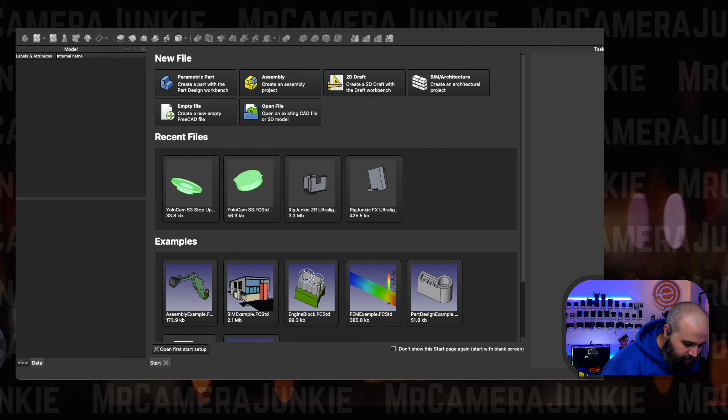All right, so we're doing FreeCAD. Okay, this is what Paul was saying, the crossbar by the window. Oh, I think that's the lights. If you're talking about the crossbar over here, this right here in the background, I'll go ahead and show you. None of that is that.

So now let me click the edit screen. All right, that worked. All right, and we're back to it. FreeCAD. So what am I doing today?

Today I'm gonna give you a real gem. For those of you watching this as a bit of a tutorial, this is exactly what I'm gonna do for you. The hardest thing, or at least for me, one of the hardest things to get done when it comes to CAD or 3D modeling is threads, right? And to create a step-up ring, you need to get the threads correctly so it can fit all of the filters on there.

Yeah, it's giving me the error again for the ISO. I got the error with the ISO. I got it.

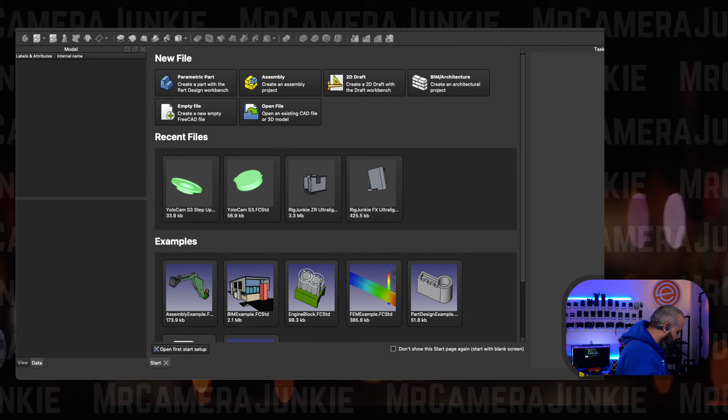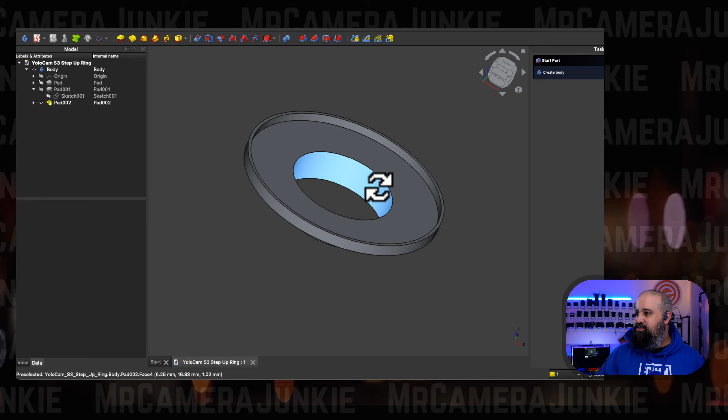All right, I'm going to go ahead and click this. This is the step-up ring in CAD. And as you can see, I don't have any threads on there, right? Because I didn't make it here. And I'm going to show you how we do that. So, you know, foreshadowing.

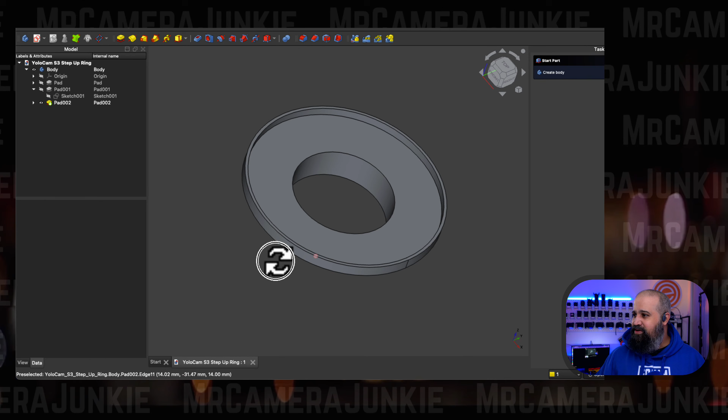I'm going to go ahead and make something very similar to this, and I'm going to do it live. I'm going to do it right now. I'm just gonna grab this as reference, but it's gonna be something similar to this. So let's go ahead and do that. I'm gonna go ahead and hit start.

And here's an FYI for everyone: I really don't know FreeCAD so well, because all of these things—assembly, 2D, all of these other things—I've never even opened these. I've only used parametric part, or parametric, however you say it, and the part design. That's all I've done, and just with that, it's just going step by step.

Whenever I come to a block, I go ahead and Google that, and I just continue to build on it. It's like you can't learn to be an expert pencil artist, but you can start doodling, right? So I started doodling with this application, and now we've gotten to a point where I'm going to remake some of my first designs, because I've learned so many skills to make things better and easier to print.

So there's going to be a version 2 for the Nikon ZR Rig Junkie kit, and also another one for the A7C Mark II, because even though what I made is successful, I'm going to remake it better.

All right, so let's go ahead and rock and roll. Today I'm going to be doing a lot with the keyboard.

Go ahead and click the parametric part. We get to a blank slate. The first thing we're going to do is create a sketch, and pick our plane.

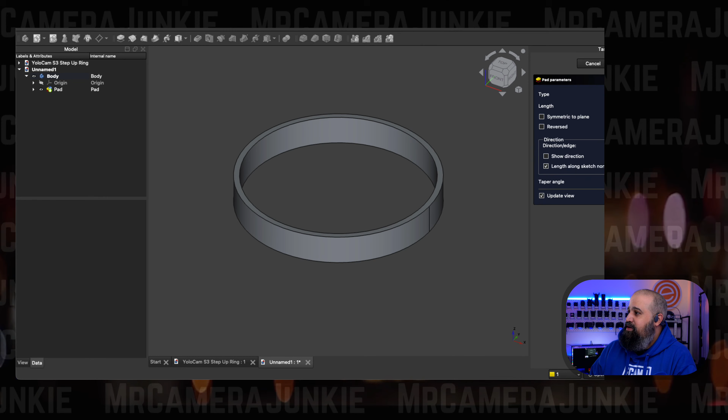How many millimeters did I make this? Exactly that, 10 millimeters, so that's perfect. Now we're going to hit OK, right? We're done, we're starting with the base. So this is what's going to fit snug, 10 millimeters over the PTZ cam that Doc has.

Okay, now the next thing I'm going to do is pick the next layer of what I'm going to sketch on, and I'm going to sketch right onto that thin little brim right there. So I highlight it, and I'm going to once again create a sketch.

Now I'm going to select this one, which is like the external geometry tool. Did I get the word correct? Yep, see, create external geometry. And I'm going to select the inside edge of the circle, so now we have a reference point, and that's all we're going to need with this tool.

We're going to go ahead and go back to the circle tool. Start at the circle datum point, and we're going to click the first circle, which is going to be that same inner part, the inner diameter. That's the word I was looking for.

Okay, so now that we have the inner diameter, we're going to go ahead and select the outer diameter. How much did I make? Because I should have added 2. So if it's 67, I should have made it like 69. Yep.

And that's exactly what I'm going to do again. I'm going to do 69, and I'm going to put 0.20. Did I do that? So I don't remember. You know what, that's why we have the reference one.

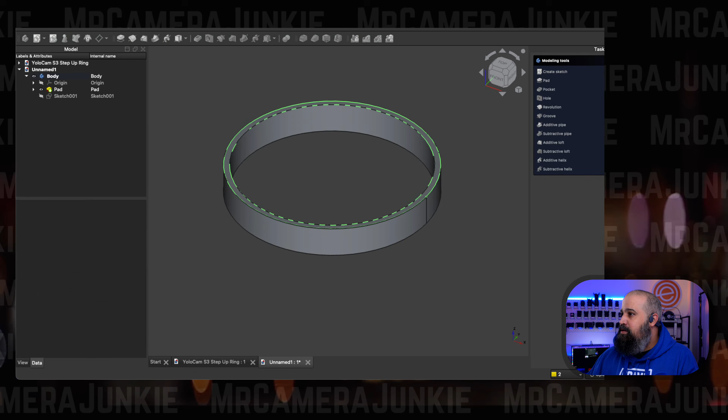I don't get why it's giving me those two lines. Okay, let's go back to the sketch. Let's just delete that. What is this? Delete this.

First, inner diameter. Holy crap. No. What? Is it that small?

Okay, I was doing it right, I was just seeing it wrong. Okay, hold on, let's do 70. Oh, come on. Oh my goodness.

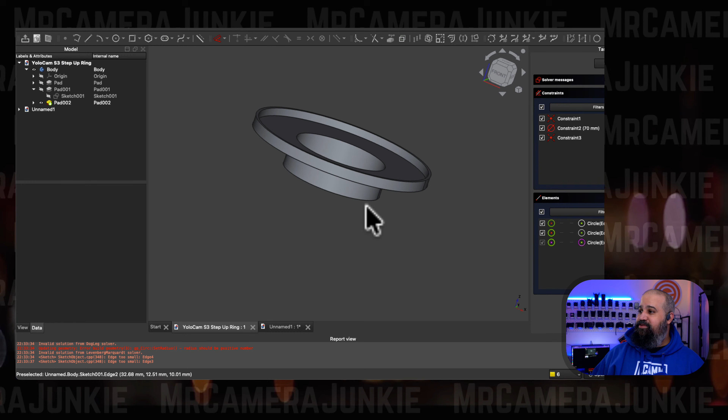Okay, gotta go back to my reference point over here. Okay, let's create a sketch. I'm gonna close that, let's create a sketch.

Datum points. So it was 69 on the dot. So I didn't add the little extra on the original one.

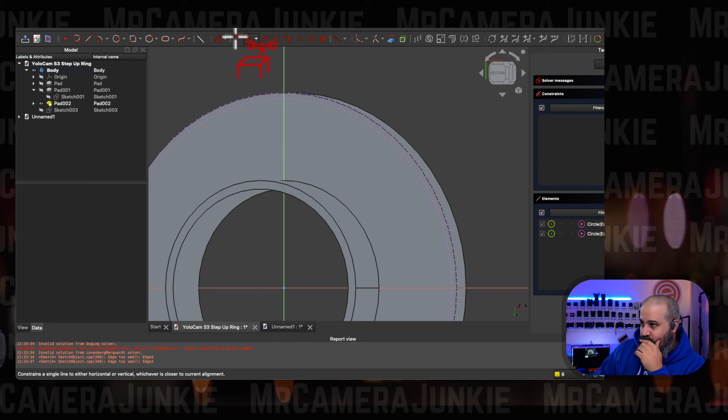Okay, this is what's going to be important here. What is that size? 66.90. Interesting.

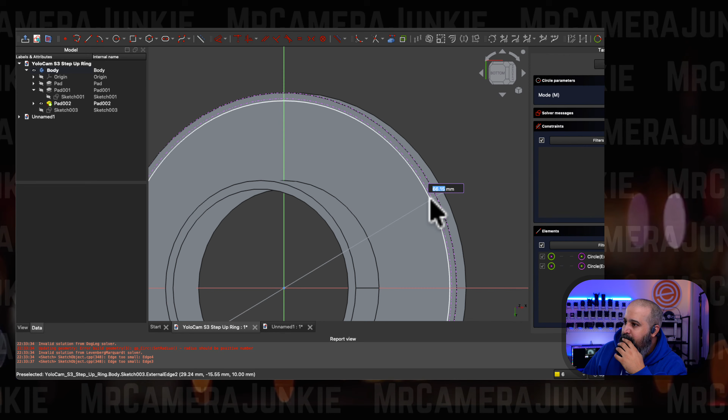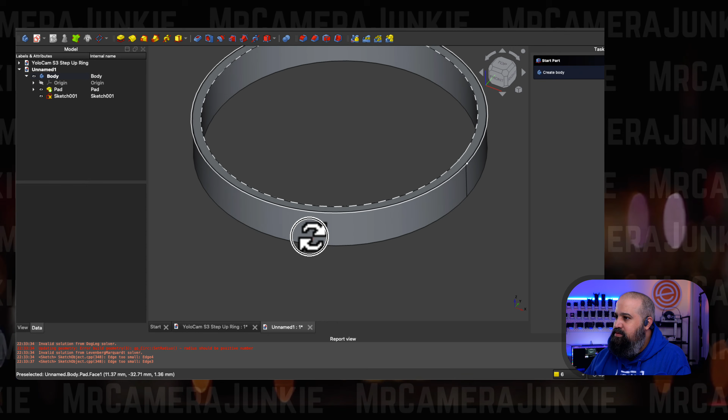Okay, all right, we referenced what we needed to reference. Okay, go back to my sketch, I think I have a better understanding.

Let me delete that circle here. Okay, and even though it's there, I need to start with the 66.9, and I'm gonna do 67. Yeah, let's just go 67 on the dot. All right, we're gonna go to circle on the inside.

Okay, that's such a minimal step up, but that's exactly what's needed. Okay, so I was mostly confused, and this mouse thing is driving me crazy right now.

Delete it. Okay, perfect, I'm gonna hit close. Okay, so now I basically just have a little, that's how much of a step up it really needs.

If you, I'm gonna zoom into it right here. See, it's just basically offsetting, because like Doc had mentioned to me, the front of the camera itself is almost at that size, so it was just a little bit. He said he was gonna tape it, but we have the ability to do this, so that's how little of a step up it needs.

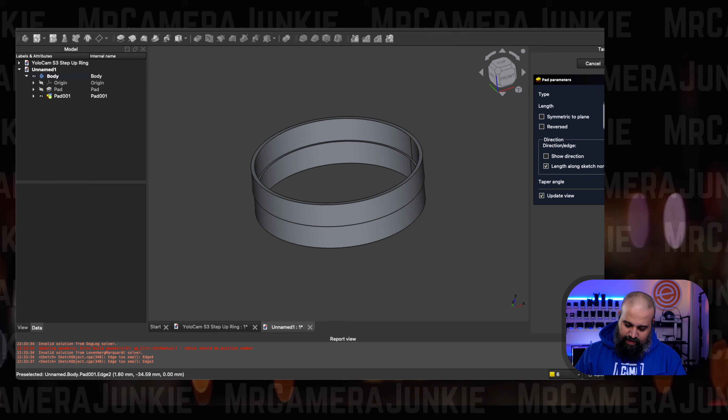But I don't think we need that much. Four millimeters. Okay.

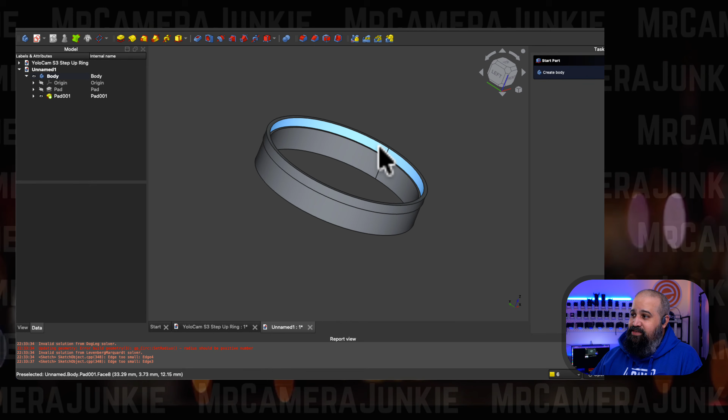And that's pretty much it, right? We have the inner diameter, which is this part here in blue, that's what's gonna hold up snug. And now we just have the 4 millimeters that is gonna stick out, and this part here is where we're gonna throw the filter threads.

So let me go ahead and save this. Tail Air 2 step up.

I'm gonna go ahead... no, brother. My struggles today is that I just decided to update to Tahoe last night, and I'm regretting it, because even though I had installed it on both my laptop, excuse me, and my Mac Mini in the back, I'm rarely on those machines. So for that reason, I hadn't come across any of the issues, and now all the settings on my mouse and everything are just all reset out of whack. And I even had to switch cameras because my application for the anamorphic is not playing the best with my setup right now and everything that I got going.

So I'm gonna go ahead and, later on, maybe tomorrow, start unplugging everything and just start plugging things in one by one to see exactly where the hiccup and the issue is, or if it's my app completely. And then I'm gonna have to sit down and do some programming.

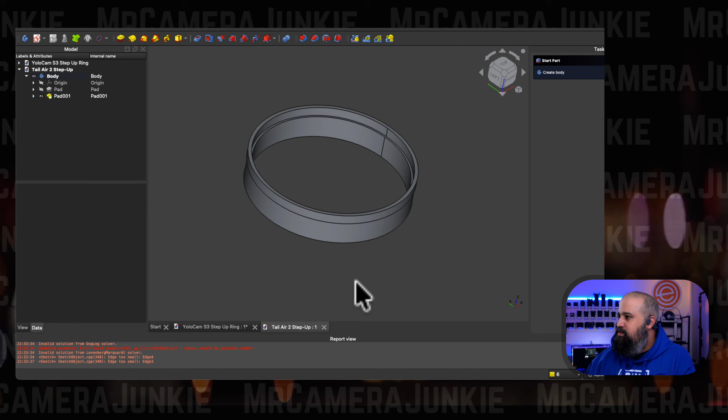Okay, now that we saved it, we can export the file now. We're gonna go ahead, oh, we have to select it. So over here, we're gonna select the body. It's all green, so it's all highlighted.

And now we can export that. And it's already got the name, and it's being saved in my FreeCAD folder.

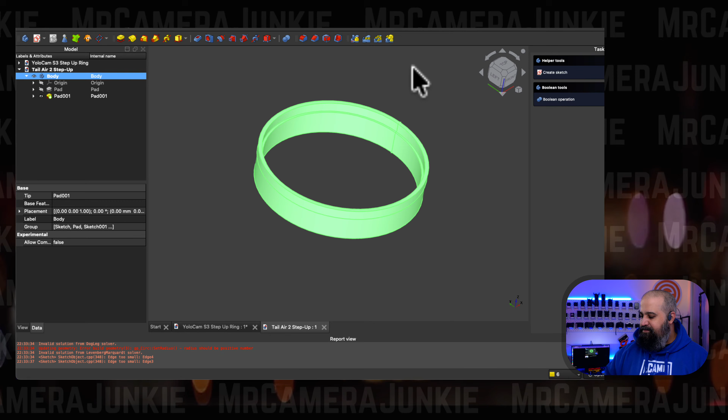Perfect, okay, so now that that's done, basically I can close this out. And I'm gonna close the window, should I? Actually, you know what, just hold on there, just leave it there. Let me go ahead and open up the other things first.

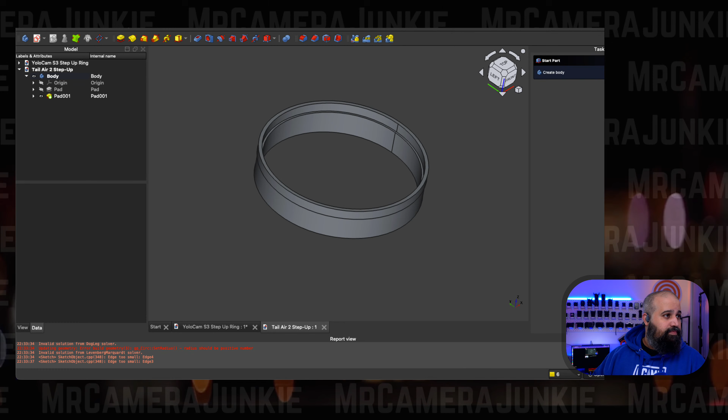Like Bambu Lab. Okay, so Bambu Lab is not there, let me go ahead and switch this up over here. Bambu Studio, perfect, okay.

Okay, so now we're in Bambu Studio, and this is the build plate. Let me go ahead and find this STL that I exported. What did I call it?

It was the Tail Air 2, but see, that's why we left the other application open. Tail Air 2 Step Up.

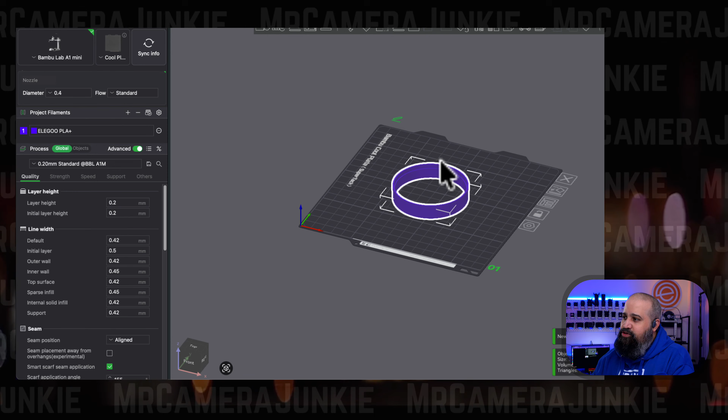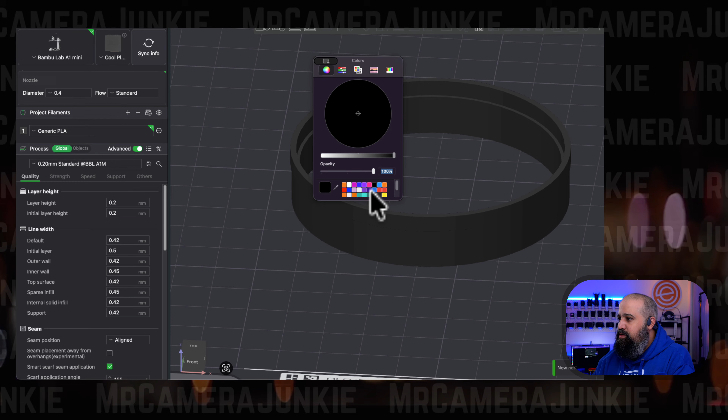Okay, so I grabbed the file and now I just throw it on there, and finally we have it on our build plate. But as you can see, we still don't have... actually, you know what, let's go generic here. Go with a light gray, I think that will look best.

Nope. White it is. Okay.

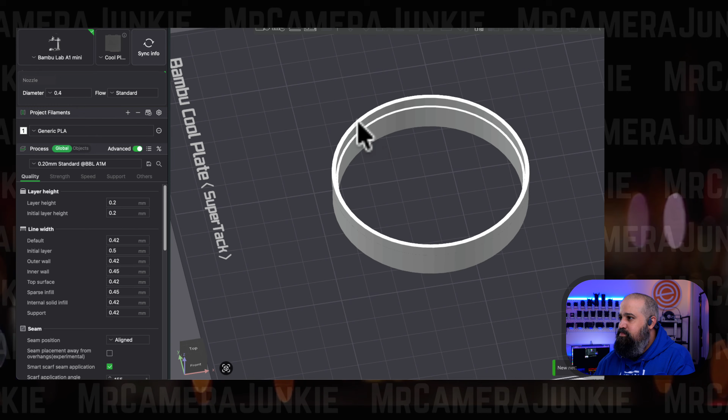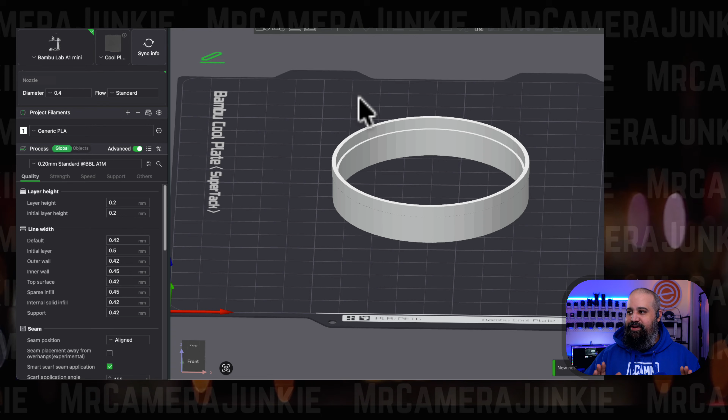We're going to be adding threads to the inside of this, and let me show you my trick. I need to find it again. Or we could do it live. You know what? Yes. My big trick when it comes to making threads, because we still got time, is I asked Chad to do it.

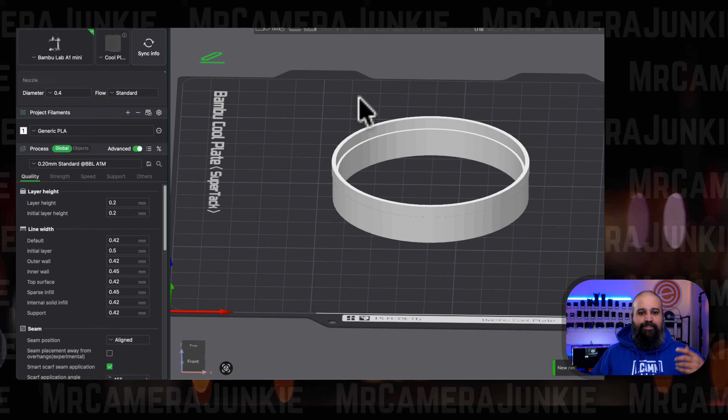All right, so I made the simple design, and like the other one, I made it just the same way. Didn't take long, but the hardest part, I pitched that over to Chad from GPT. So let's see if I can open up a window here. All right, let me go ahead and summon Mr. Chad.

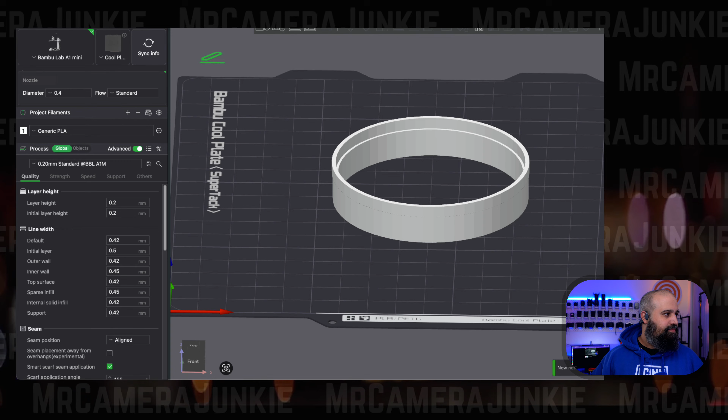So again, I'm going to switch this from Bambu Studio to Google Chrome. No, that wasn't Google Chrome. You guys didn't see that - that's foreshadowing. Yes.

Okay, so what's on the agenda today? Let's go ahead and we're gonna ask Chad: we need a 67mm filter thread STL file.

I'm just gonna give it the information, right? I'm gonna say, look at me, 4 millimeters tall... let's see, I think that's all I really need. 4 millimeters tall with 1 millimeter thickness. I just put that in just in case, right? So now I'm gonna hit enter. And it's giving me 2 responses, but I just need the file.

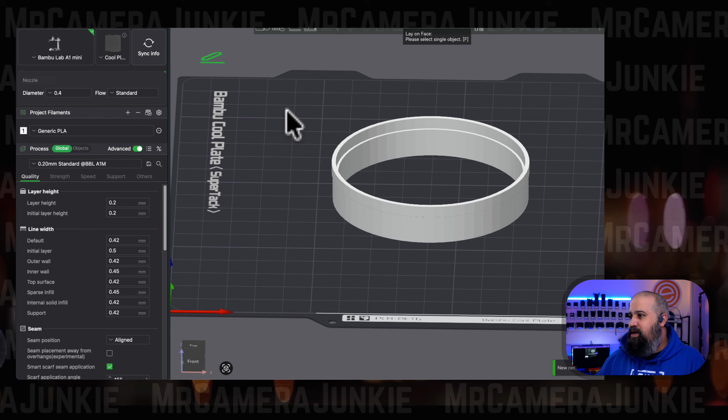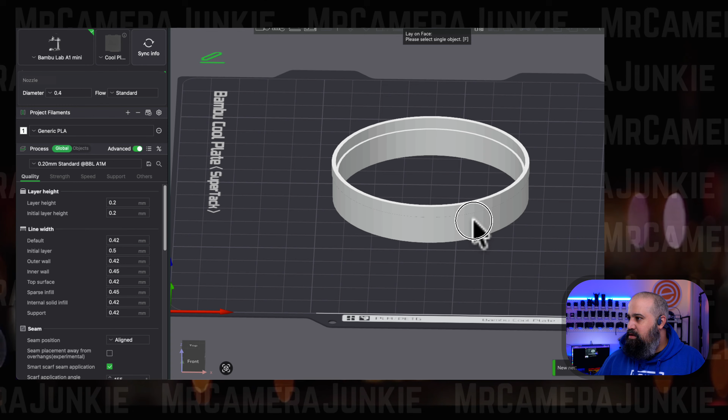Okay, now that we're in Bambu Studio again, I'm just gonna go over here and I should go to my downloads. I'm having so much fun with Tahoe right now. All right, let's see what this looks like. Okay, I think I got it. So I'm gonna go ahead and just throw it right onto the bed, and bam, there we go.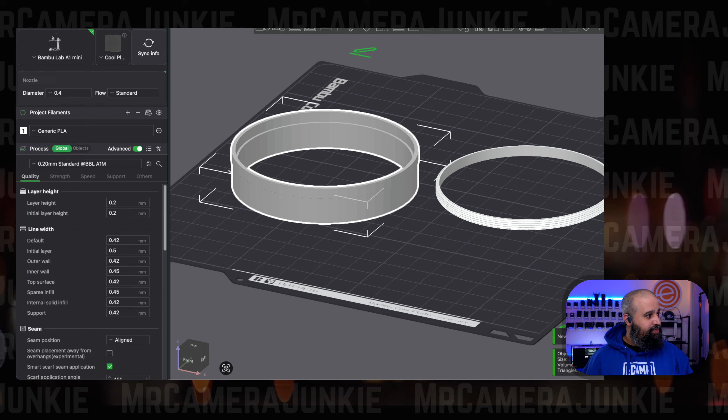Okay, you know what? That's the smartest thing - let me duplicate this scene. Okay, and this one I'm just gonna switch over to, because if we have to jump back and forth... okay, so now I should be able to switch. Yep, okay, that works, that's gonna make it a lot faster.

I need the inside. Right, well, let's see what Chat did. Chat did the same exact thing, so must have been my commands, obviously.

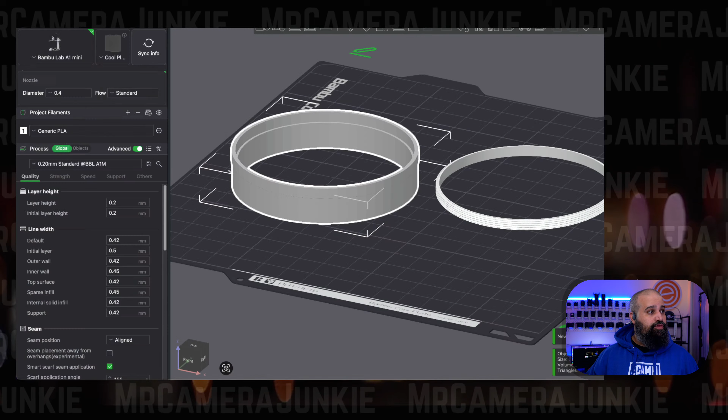All right, Bambu - gonna click this and we're just gonna delete that. I'm gonna go ahead and grab this, throw it on there, and we have the internal threads. Perfect. All right, so now how are we gonna merge these together? Because this is sitting flat and so is this design.

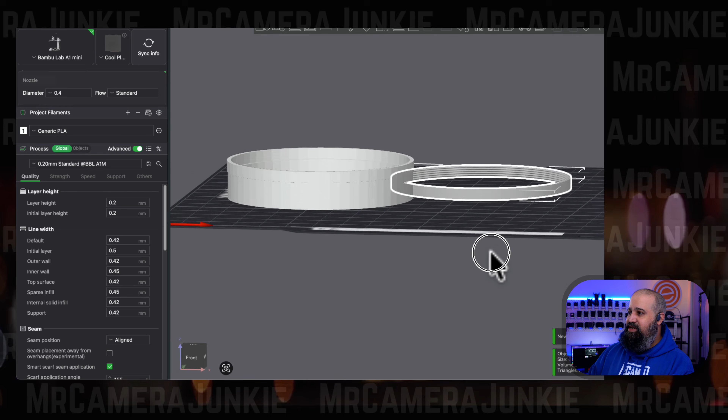Well, I'm gonna go ahead and take this, it's okay, and we're gonna flip it - I'm gonna flip it on his face. Bam, so now the facing part is also facing the threads. I'm gonna select this.

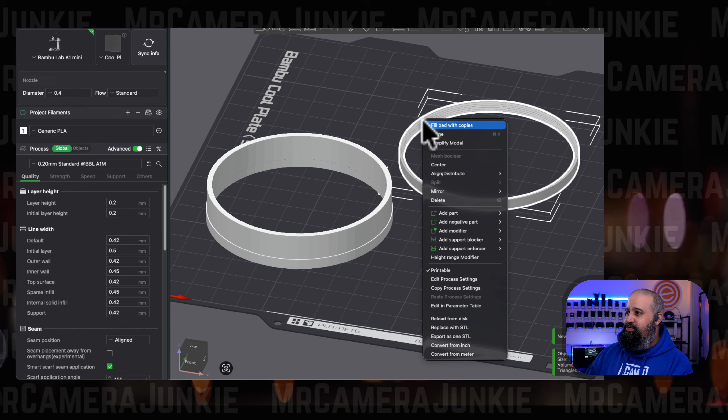I'm going to right click and hit center, and it's going to center it perfectly. Then I'll click this and do the same thing, center it perfectly. Now that looks like a perfectly made step-up ring for Doc's filter.

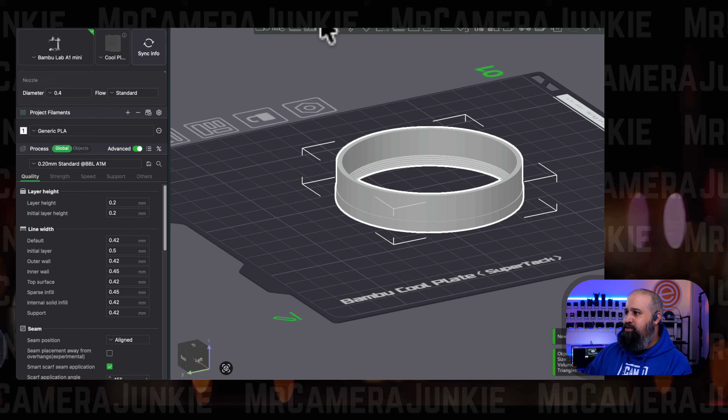So now I'll click the blend and select all, and I should be able to merge. Bam, now it's one part. If I wanted to, I could easily take this and reflip it, so now the threads are on top and this is ready to rock and roll. We can look in there, see, it's got the perfect pitch thread.

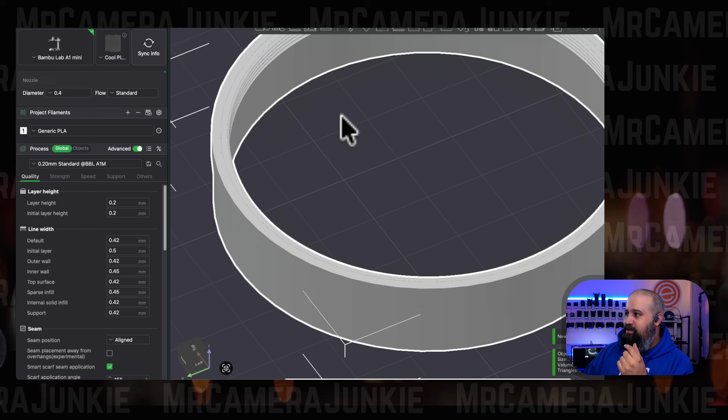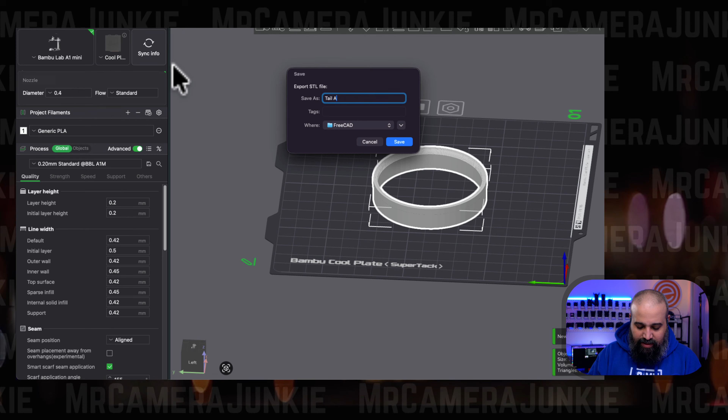Perfection. And worst case scenario, if you really wanted to, you could still separate it right now as it is. I can now export this as a single STL, and we're gonna call it tail air 2 step up.

If I would have given Chat or whatever better instructions, I would have had it right the first time. And now we save it. Hold on. Step up Doc.

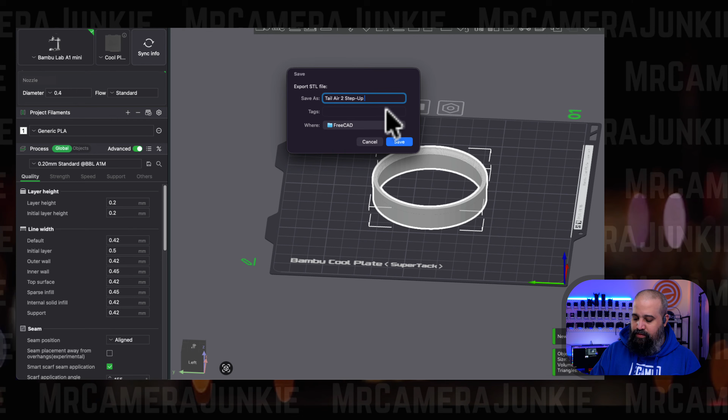Actually, we're gonna brand it - that separates it, Rig Junkies, step up. Bam. And now we hit save. And we've exported that, and as you can see, we have the step up ring completed.

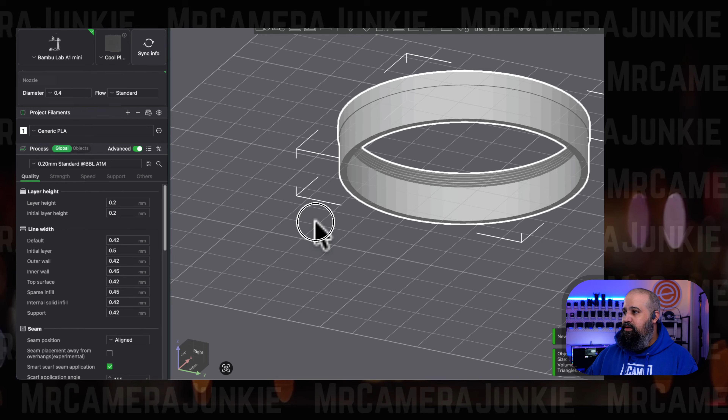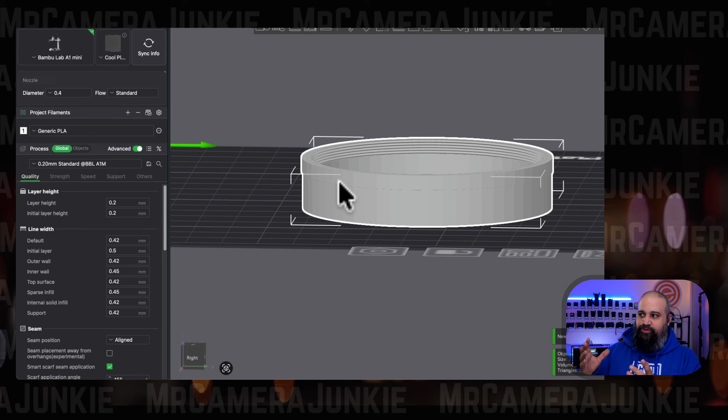But now, let's say for example you were going to make an actual step up ring, and you're going to make it from one size to another, like filtered. You can still go to Chat and make that external filter, or the external threads, and do it the same way, but kind of reverse it. So just to finalize, if we had the original reverse threads for the outside, but let's say we made it from a much bigger size.

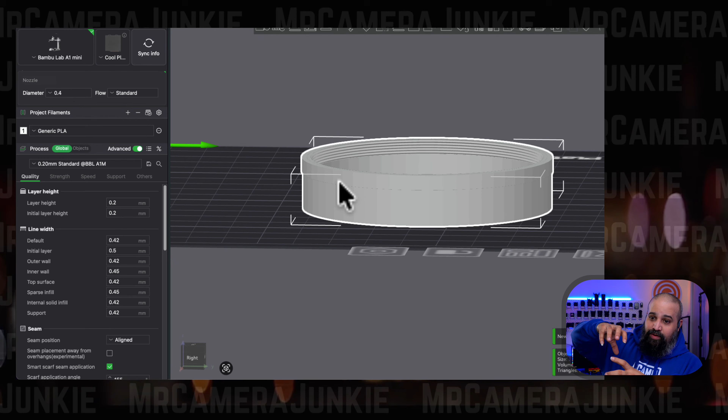In this case, it will be a step down ring. So just making it all over again. Let's say you had a 67 millimeter thread, you start with that one, you create the external tube, and then you have Chat or Claude make the threads for the step up ring size that you want. So if you're going from 67 to 82, you'll make the internal ones the 67 and the external ones 82, or vice versa.

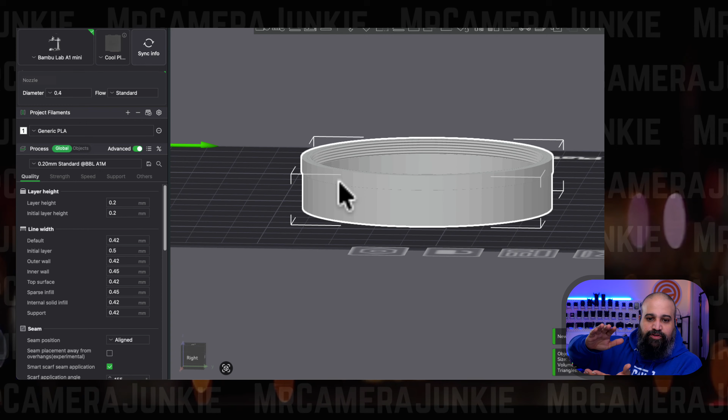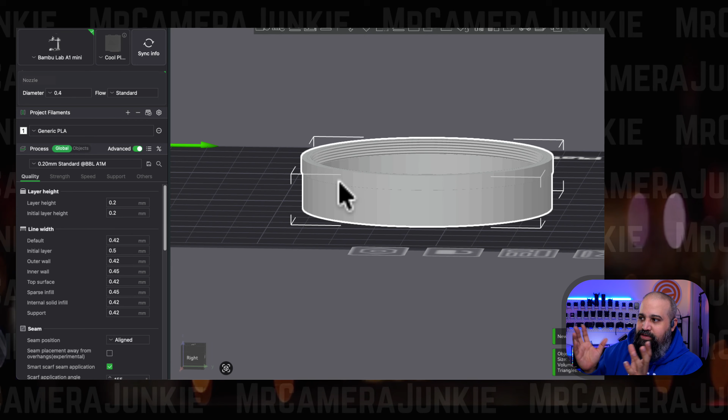So you have those patterns, and then you just build the step up ring as these sets of tubes that interlock with each other for the sizes. Once you get to the Bambu Lab, you'll throw the first one on, which is the external, you'll center it and fuse and merge those two together, then you'll throw the internal one, which is the bigger one, flip the item upside down, and once again fuse those and export it, and you have your perfect step up ring for whichever size to whichever size you need, and you're gonna be good to go.

Let me see what you guys think. Oh, Doc made it.

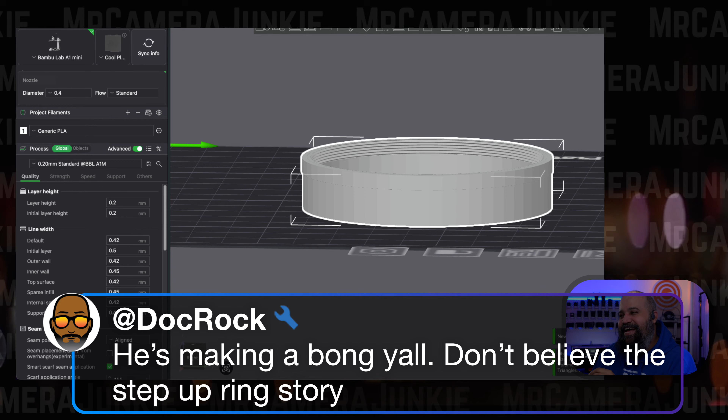You know what, now you got me on another thing. Could you make one? I'll design one and throw it on MakerWorld. That's hilarious. But Doc, you're all set, brother.

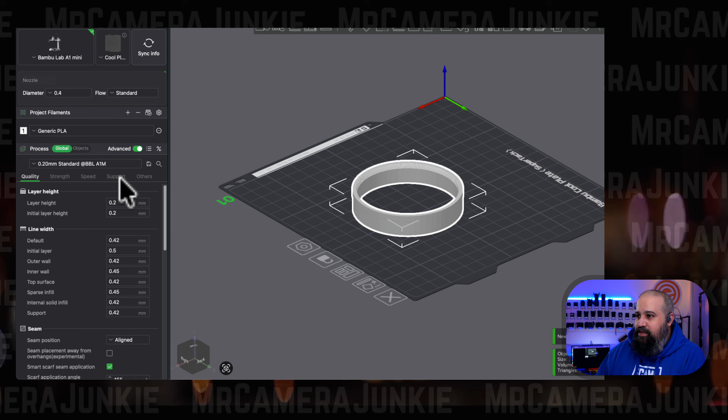So I already got this for you, and now you're good to go. I'll be able to send this over to you and you can print it. I would say put it with the threads up, because the way that it's set up, I can just go right now and most likely, look, this with no supports is gonna print perfectly. You see, no errors, the slice is okay.

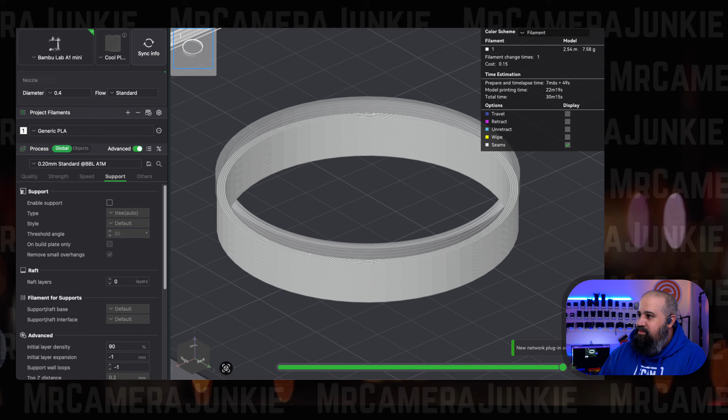Yeah, this is a piece of cake. Yeah, done. Done and done.

So that's my trick when it comes to making threads. I ask Chat to do it, and I give it the best type of idea, and I never nail it right. But now I have a 60 millimeter filter thread, that STL file that I just got, and I actually have both - so I have the internal and the external - if I ever want to create another step up ring, like I just mentioned, and I'll be able to implement those into any of my designs, simply.

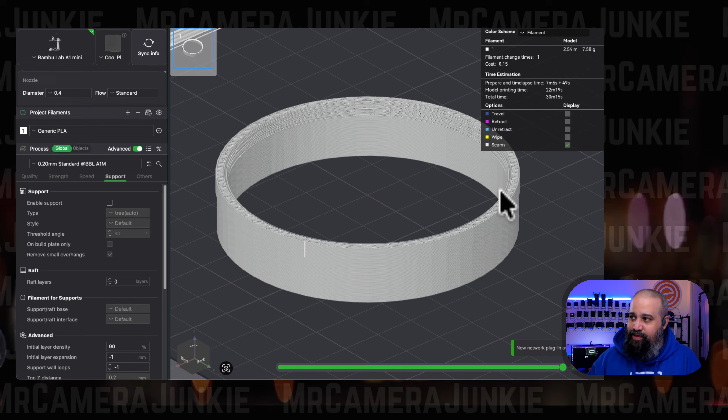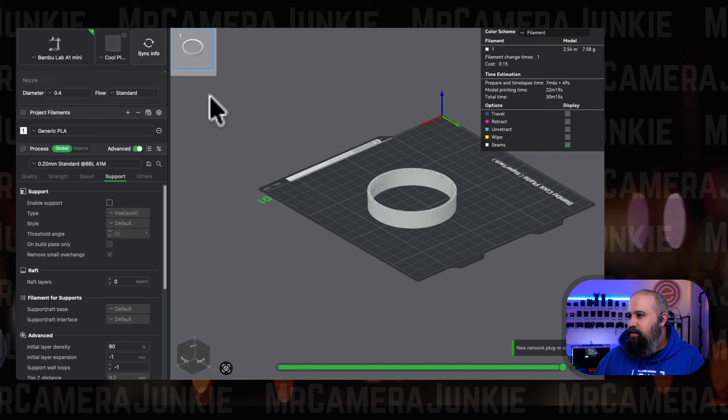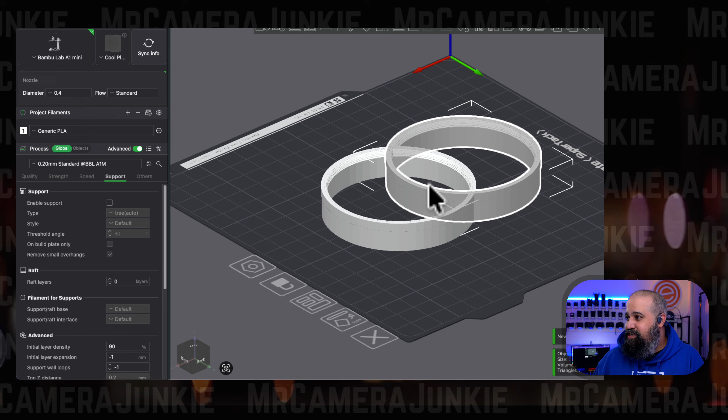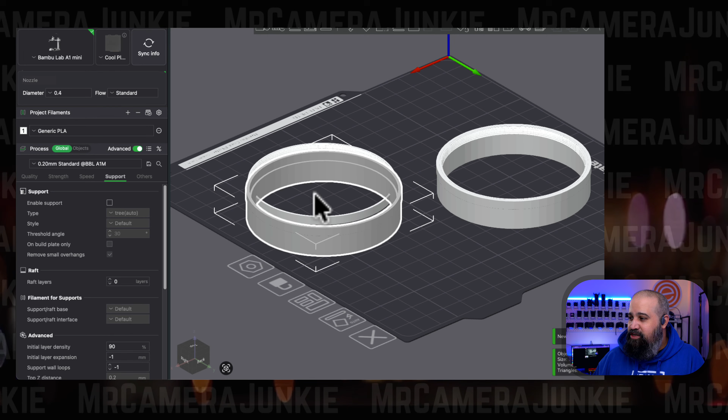So let me give you the best example. This one, I can right click it and split into objects. See, as soon as I split into objects, the filter or the threads fell to the floor. They're no longer together. So to avoid this completely, this file right here, if I try to split into objects, oh shit, it still does it. I just learned something new, because even though I thought it couldn't, it can.

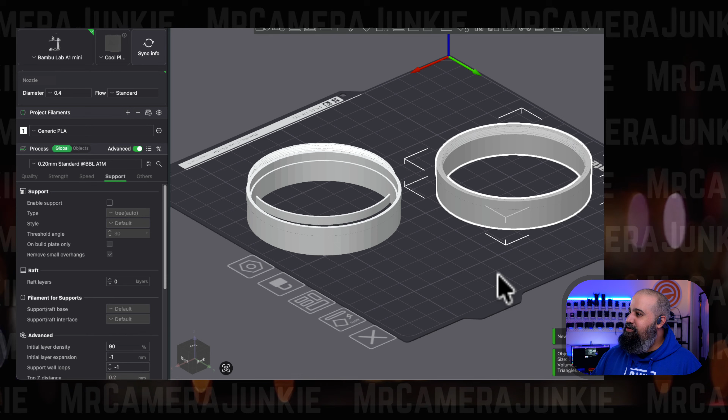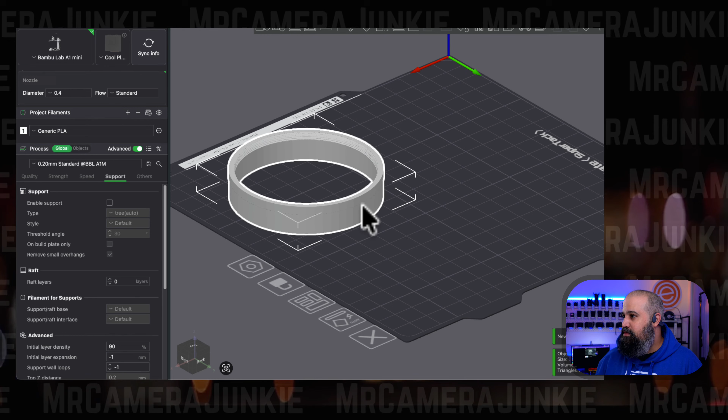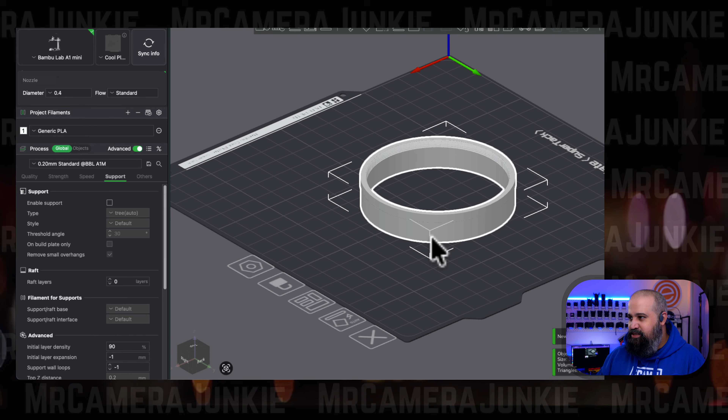They can still mess it up. Oh well, but there you go. You don't really need to. Learn something new, because I thought by creating it into, maybe that's this thing. Hold on, Mesh Boolean. Yep, okay, that's what I needed to do. I need to do the mesh first. So now I can export this and it won't split. You see, even the split option is taken off. Okay, so I knew there was a way of doing it. So this is the dummy proof way. All right, and that's done.

All right, we completed the filter thread or the step up ring, and we're right on time. So now let's go ahead and go to these other shots over here.